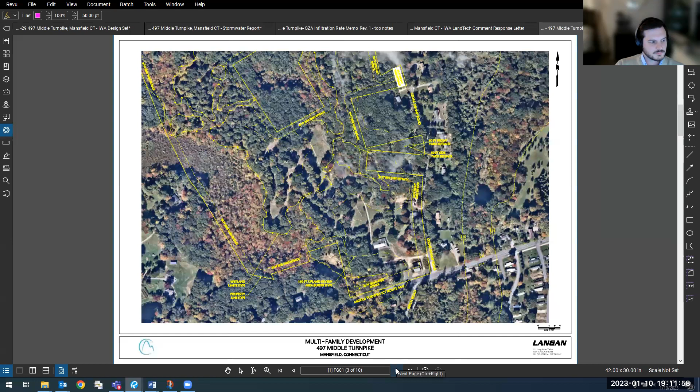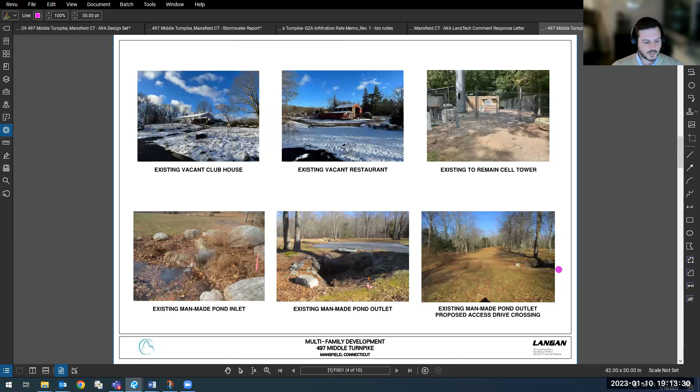As part of our application, the man-made pond will remain, and the access road connecting our southern development to our northern development will run right up and down this fairway. So you can see this site under existing condition is largely disturbed, and our proposed development will remain mostly within those limits.

This slide depicts the sensitive areas: wetlands, the 150-foot buffer setback, upland review area, and property line setbacks. You'll also notice a few FEMA flood zones located off-site in the eastern direction. The site actually has a pretty significant change in elevation, from about elevation 600 on the eastern side down to about elevation 500.

Existing watersheds follow that direction, so most of our water is heading down to this western wetland system, on the extent of our site—we'll go further once we get into the wetlands report.

But I did want to bring up our proposed development, which is displayed in black in the background here. You can really see how we've planned out this layout to work around the wetland systems while remaining outside of the 150-foot upland review areas as much as possible.

The vast majority of our impacts will be within the upland review. There's only a very small direct wetland impact area, and that's directly at the man-made pond outlet structure and proposed connecting access road that we discussed previously. That is located right here.

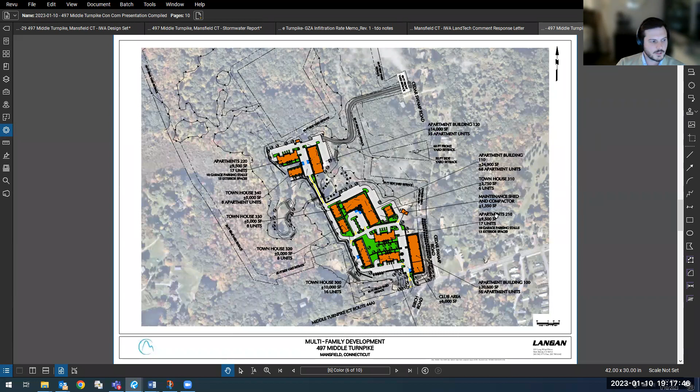If we move on to the next slide, Joe had mentioned that we previously submitted this application back in September of 2021. This slide compares some of the differences we've seen from the previous application to the new one.

In magenta, you'll see what our previous application proposed, and in black or blue, you'll see what our current application proposes. We've acquired the 17 Cedar Swamp property in this region, which allowed us to reconfigure the site circulation and layout to pull away from some of the higher functioning wetlands on site, providing setbacks and lower wall heights that were requested by the town and peer review inputs.

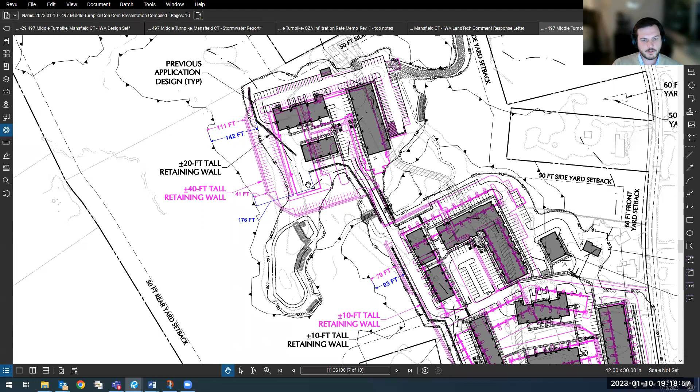Starting in the northwestern region, we are increasing our setback distance from the wetlands by roughly 30 feet in the upper corner, and we increased that to about an additional 130-foot setback from hardscape in the proposed condition in the new application.

Those setbacks continue as you move down the site. Again, we're seeing about a 14-foot improvement for setbacks from the wetlands here. Looking at wall heights, our previous application had walls up to 40 feet tall in the northern section. The maximum height in the proposed condition is about 20 feet.

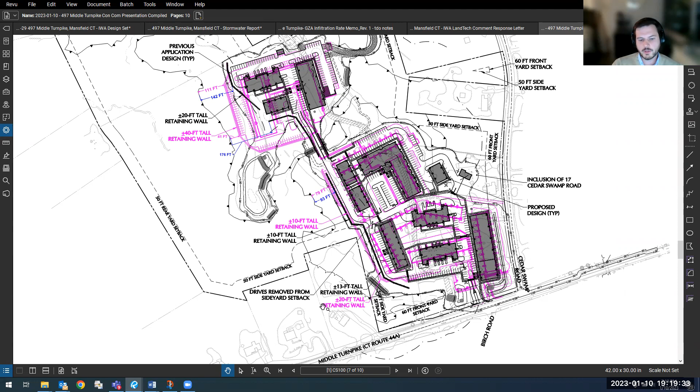Along the southwestern region of our previously proposed application, we were reaching heights of about 20 feet. In our new application, we have reduced those to about 13 feet tall. So I think we've significantly improved and responded to the previous comments collected from the last application.

We have also prepared a stormwater management and conveyance system in support of the proposed site plan and project. This is a very robust stormwater management plan. Our main source of water quality treatment is through infiltration, and we have 4 separate infiltration features - 2 above ground infiltration basins and 2 below ground. The above ground are highlighted in yellow, the below ground are in dark purple.

We also have below ground attenuation systems, which are not intended to infiltrate, but before water enters those systems, they pass through hydrodynamic separators, which remove a significant amount of suspended solids and also treat the water. In some cases, we're receiving almost twice what the required water quality volume treatment is.

We're also attenuating flows for all the storms to reduce in the proposed conditions for each analyzed storm event. To avoid point discharge locations, we've included level spreader designs rather than point discharge everywhere we were able to accommodate them, so water will bubble up into a trough-like structure, evenly rise, and then overtop into the wetland at a very low flow and low depth rate throughout these storm events.

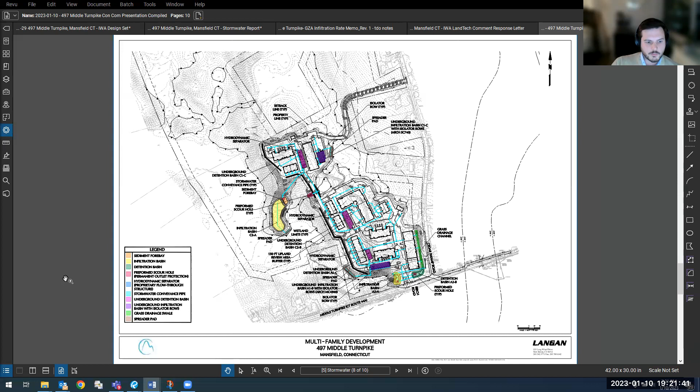And with that, I'll turn it over to Jim McManus to discuss some of the details of the wetland report.

Good evening all. My name is Jim McManus. I'm a certified professional soil scientist with JMM Wetland Consulting Services with offices out of Newtown, Connecticut.

I conducted soil-based wetland delineations starting in December of 2018, and then went back in February and July of 2019 to finish all the wetlands you see on the project. I flagged the wetlands for the entire parcel, even though the northern 30 plus acres is not going to be touched, but I flagged all the wetlands anyways.

I'll start by going through each wetland and giving a brief description. Starting in the southern part near Middle Turnpike, we have what I called my numbered series wetland, located right there next to Middle Turnpike.

It's a stony wooded swamp that does receive some stormwater runoff from various locations, road, and probably the existing development. The next wetland is what I call the B wetland, which is the man-made pond.

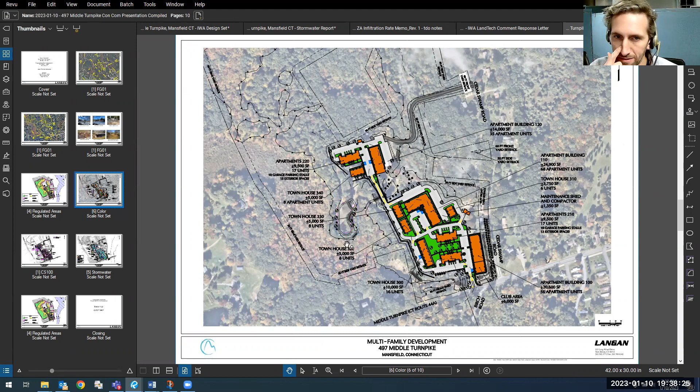The things I'm most interested in myself are vegetation, as we just talked about, and the stormwater management. As a case study of concerns about it infiltrating as intended or functioning as intended, I noticed the basin that's the farthest west. That seems to be the most downstream. In the earlier presentation - I'm sorry, I forgot the gentleman's name - I think you described it as kind of receiving water from the other detention systems and then percolating up through that infiltration basin C2A.

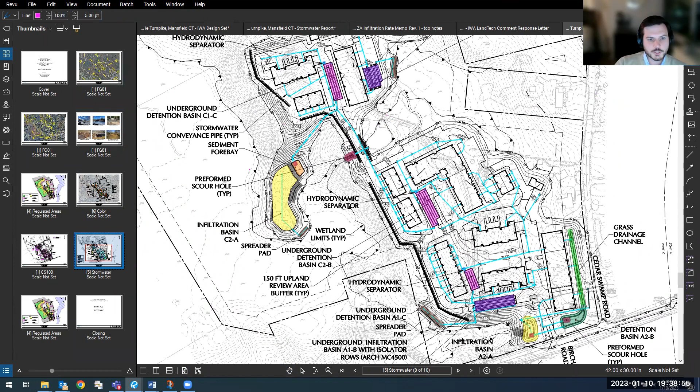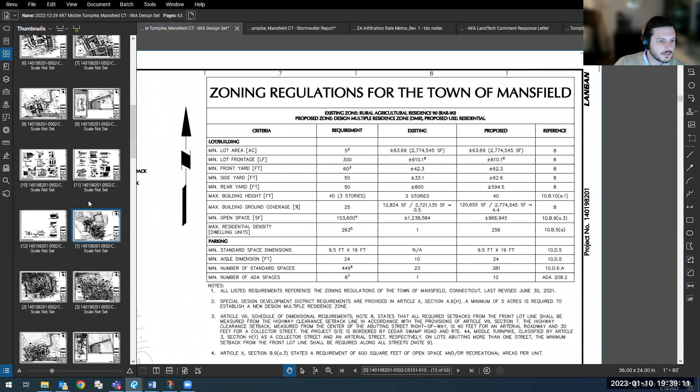It's discharging to the wetland. So there are two different aspects to this infiltration basin. The main attenuation and treatment basin, the infiltration basin highlighted in yellow, is separate from the outlet structure that I was referring to as the level spreader. So the level spreader structure, instead of having a single pipe come out to a single point and discharge into the wetlands, we have - actually, it may be better if I pull up a zoom-in of this one, just because it's a clearer example.

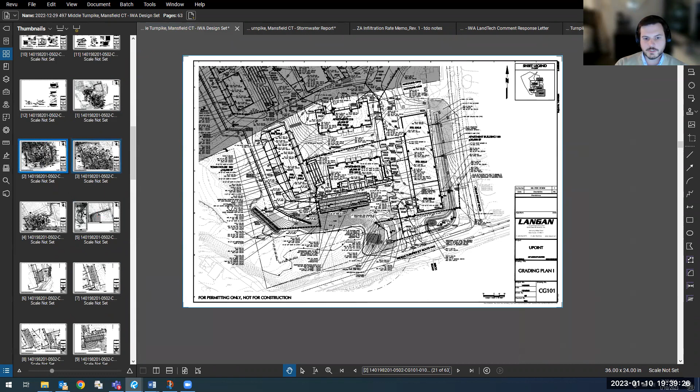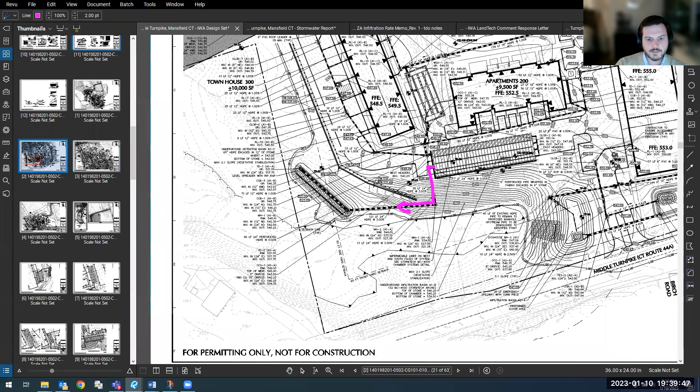The pond we were just discussing has a very similar situation to this one - this one was just a little bit clearer. This is also a level spreader structure that discharges from the underground system to the right here, so water flows in this direction. This pipe that you're seeing here is actually a perforated pipe buried in stone itself. If you look at this in profile view, we're coming down the hill to a depression, to a slight raise, and then off, and the wetland system is down here.

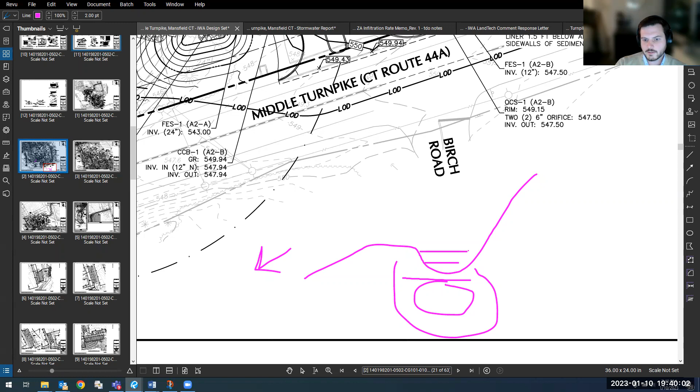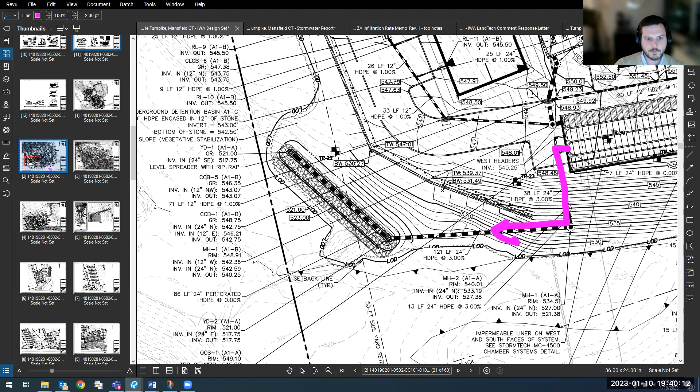So the pipe would be underground, encased in stone, and water would fill at a constant rate until it reaches the lip of the level spreader, which allows it to spread out the flow at a slower rate and shallower depth over the entire length of this stone item, and then down into the wetlands. So it avoids a single point discharge that could potentially over time develop a scouring or erosion effect.

So it doesn't have anything to do with the detention or treatment of the water per se. It's more of a channel protection or erosion control feature. Okay, long term. Gotcha.

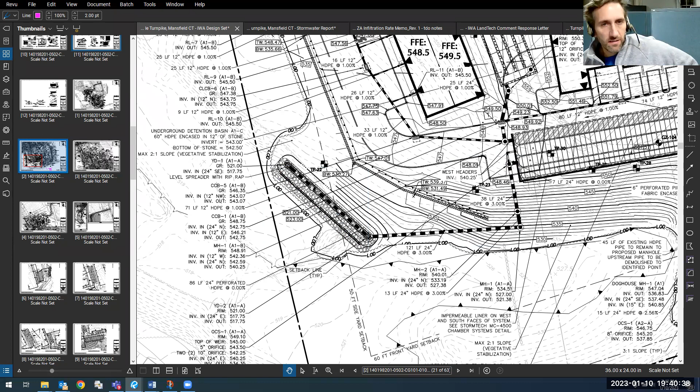So the basin, the C2-A, I noticed its proximity to the wetland, and if there is a high water table in that wetland, I'm always concerned about the adequate clearance you need to achieve that infiltration, if that's the intent of this practice.

Yep, it is. This one is an infiltration basin, and we actually just received our final revised infiltration testing from our geotechnical engineer last night, and I spent the morning going through this stuff, making sure everything was good. So we're ready to incorporate, and we have all of our tests performed in this lower basin.

And if you'll notice this one here, this is actually a monitoring well. So we have historic data from this point, and then 2 additional tests throughout to define our seasonal high groundwater, provide our 3 feet of separation for infiltration, and we're ensuring that we have our clearance over rock and everything is appropriately designed.

So we got our definitive results and data to say this is functioning, and we'll be able to work that into the plan and resubmit shortly.

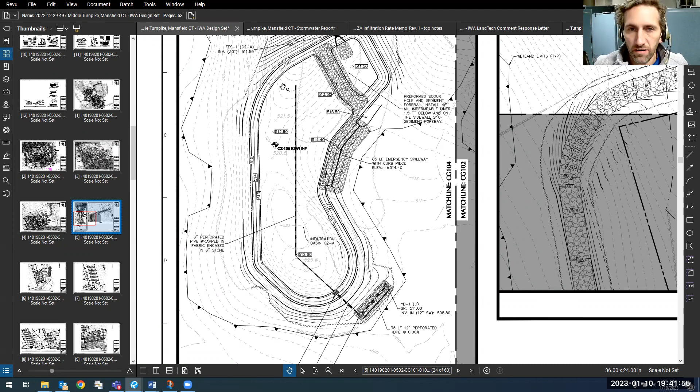Thanks. And just to confirm, there's no water courses on the property, right? It's just the constructed pond and the wetlands. There's intermittent channels. I would classify the outlet structure from the pond as an incised water course, intermittent. Okay. Thank you.

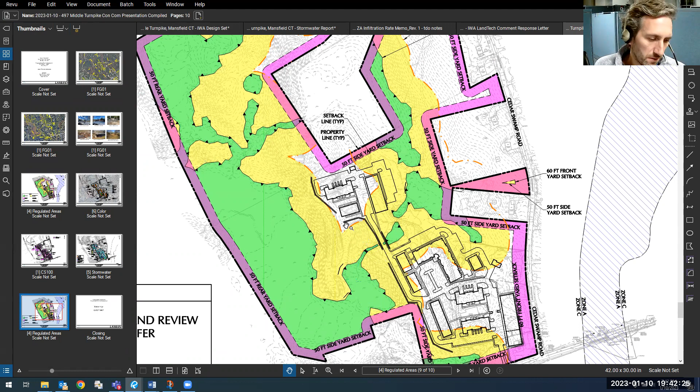So does anybody like to start crafting a motion here, or have any additional comments that Chad can put into our motion?

Looking at the plant list, for the most part, it looks really good. I think I mentioned this before, but encourage the use of natives, and it looks like most of them are, except Norway spruce. I guess I'm not about...

It's cutting out a little bit on you, Aaron. Sorry, the Norway spruce just kind of stood out to me as there might be a better native. Okay, so overall, the species selected in the planting plan look pretty good, but there's maybe something to reconsider, or an option to look for, you said, for Norway spruce.

Yeah, and then the Pagoda dogwood, I'm not familiar with that species. There's other dogwoods that are native that would be a good replacement. I think flowering dogwood is one.

Okay. Those are interesting.

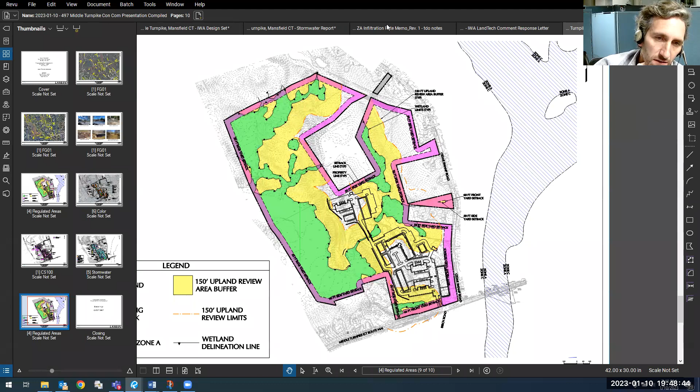But if the applicants are here and know those numbers, it may help. Anybody from the applicant, can you give us a sense of the area of added impervious surface? Yes, just give me one second. I'm going to have to open that up and find it real quick.

And then similarly, Michael, we've talked about the amount of fill that's going to be required in the 150-foot upland review area, in the yellow, particularly to buffer those retaining walls, which are built near slopes. So exactly how much fill is required versus sculpting, I'm not entirely sure.

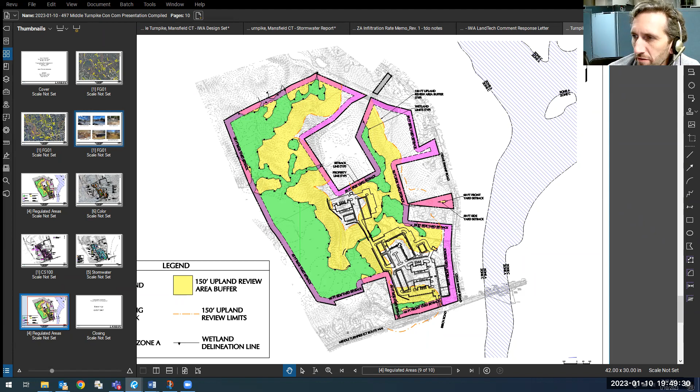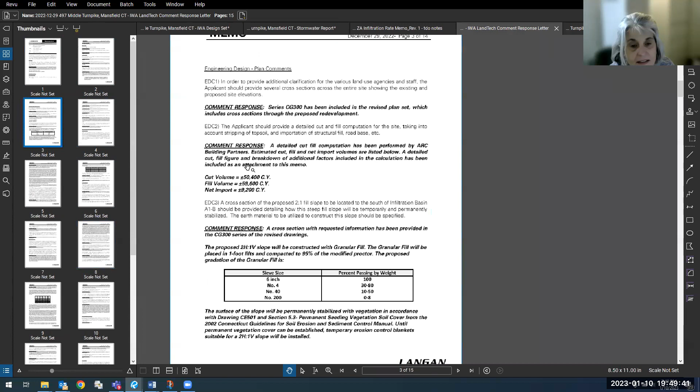Jennifer, one of the questions in the application says quantify the volume of materials being deposited within 150 feet of wetlands. Is that a cubic foot number? It doesn't give a unit. Yes. Okay, so that says 25,500 cubic feet.

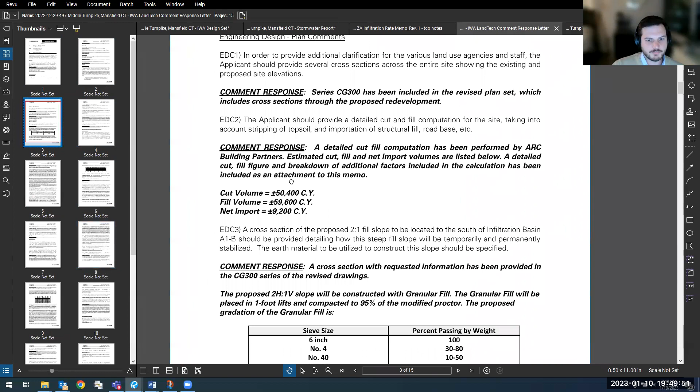Right, and sorry, this is what I'm showing here. This is the full site, not just within the 150 feet.

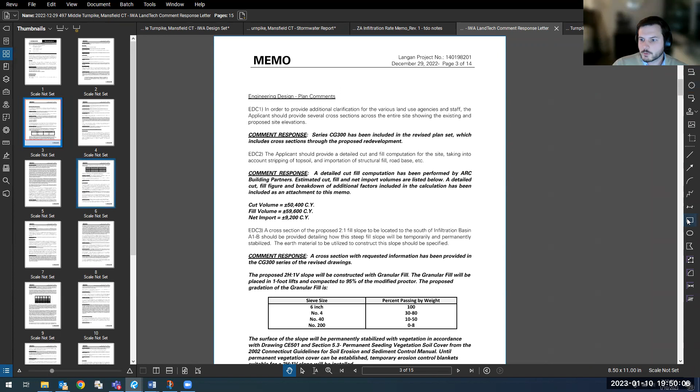So sorry, can you guide us, Tim? Where are we looking here? We're looking at a response to comments from the first round, in the middle of the sheet here. This takes into account the entire development, not just the 150-foot buffer, but this was the analysis performed.

Okay, so is the 9,200 roughly that 25,000 cubic feet? Well, correct, on the application it's actually in cubic yards, not cubic feet. So it's 25,000 cubic yards being deposited?

Yes, it's kind of a tough number to nail down exactly because we are removing and depositing, and there's a lot of earthwork on site. So you'll see in the response to this comment, the site has a net import of 9,200, but the fill volume, which counts cut and fill, would be 59.6. If we subtracted all of the cut volume from the fill volume, that number would balance much more closely within the 150-foot buffer as well.

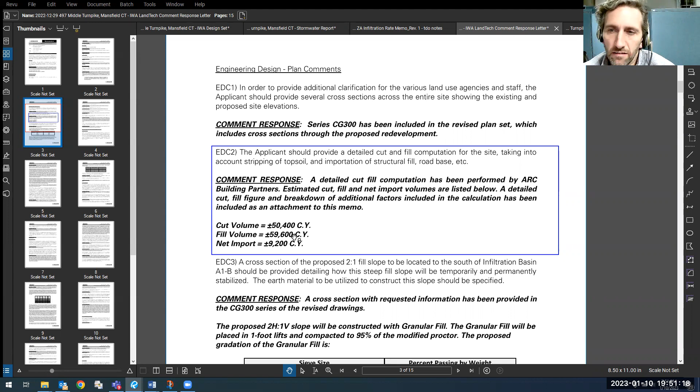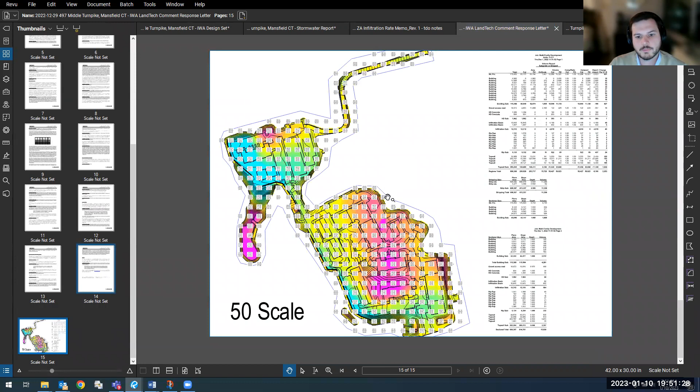So there will be quite a bit of cut and fill. Could you talk a little bit about the grading? Maybe that would be helpful, Tim. Yes, absolutely. We actually had a colored figure put together in the comment response memo that goes over the site and represents the cut and fill areas.

So if we're looking at this, the center of the site with the magenta, those are our areas of largest cut. And if we look at the cyan, that swings to our largest fill areas. So if you'll notice, all of the areas with our retaining walls around the edges, which are the closest areas to the wetlands within the 150-foot buffer zones, those are all significant fill regions.

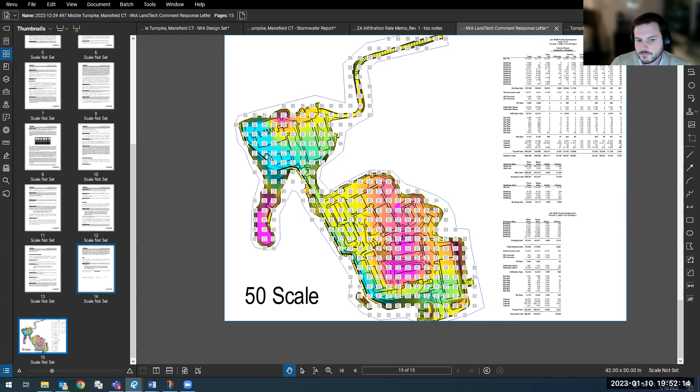What is the unit on the cyan coloration? What's the scale? Our greatest area of fill is roughly 23 feet or so in this region here. Yeah, thank you.